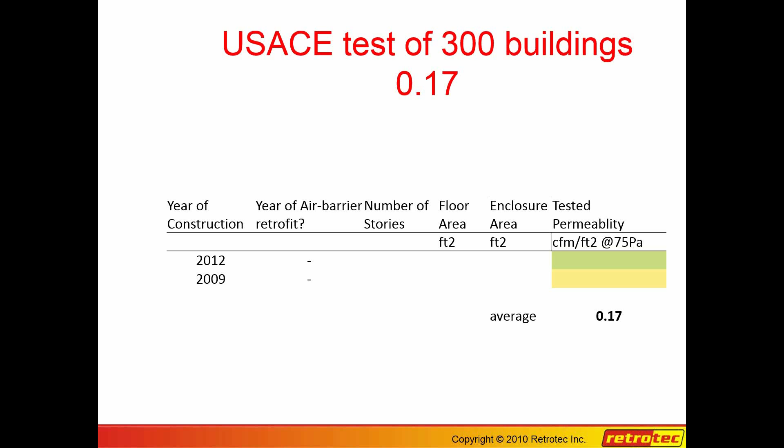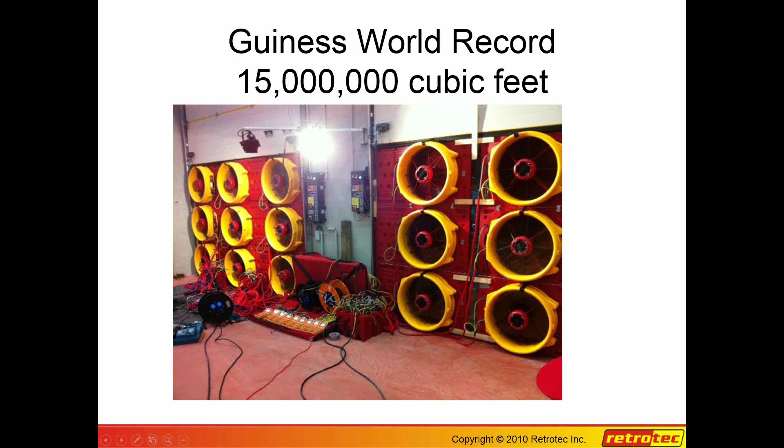So that just gives you an idea of where we might be going, and then now we'll talk about how we're going to get there.

So the simplest building we can consider is just one big box, and pretty much doesn't matter where you put the fans. You can put them anywhere, pump up the box, and measure the pressure anywhere. That's pretty simple. That's kind of what testing a house is like - you pressurize the entire house, even if you've got a partially open doorway. There's very little volume behind the doorway, very little surface area to leak, so you pretty much get exactly the same pressure instantaneously everywhere in the house.

So as we move on from there, we get more complicated situations, and I'll just look at our next slide here.

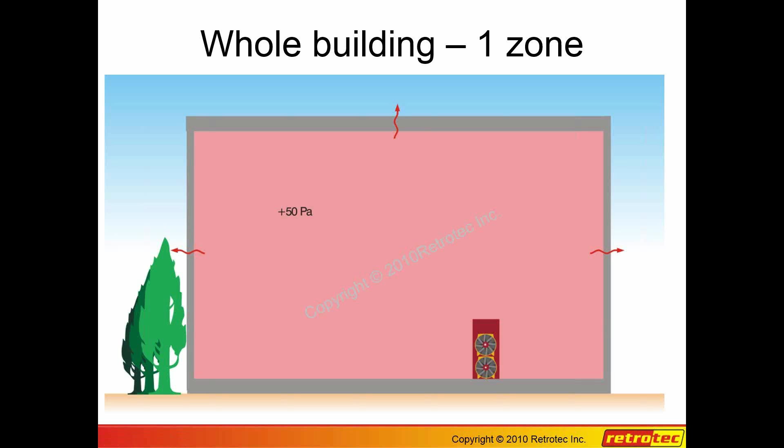So this is what a connection looks like in a large space. We're doing all the connections from outdoors simply because there's more room. Normally these tests are done from inside, but you should be able to do them from either side. With our equipment, the red tube always goes through the panel - here you see it going through the panel into the inside portion of the building. And if you're inside, the red tube still goes through the panel. In that way, our fans are referenced, assuming that the red tube that goes to the red port is going through the panel.

So since in this diagram we're outside, the blue tube, which is the positive side of channel A, is picking up the pressure outside. And here we've simply teed this off, so we've got a T on here, and we're picking up the pressure in 2 locations, roughly to the extremity on one side versus the other side of the building. We're not going to get into a lot about the best places to pick up pressure - we're just going to look in this presentation primarily at how we should be making our connections.

So here, going to the fan, we've got this kind of orangey brown connector, which is the control going to the fan, and we've got a yellow tube that picks up the flow pressure, and the green tube, which is the reference port.

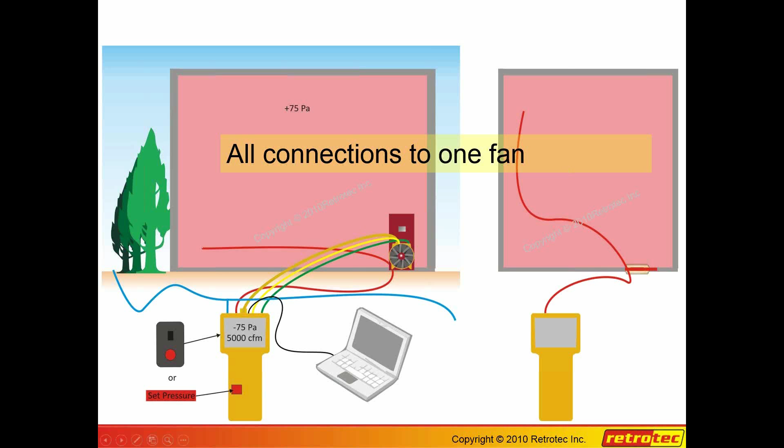So this is one gauge hooked up, and here we're breaking it down. We've got the gauge outside, we've got the red reference tube going inside, we've got one large volume, so we can pick up that pressure anywhere, it doesn't really matter.

A good rule of thumb is if we've got one gauge, we probably need to pick up one pressure inside the building. By the time you get to 3 or 4 gauges, you probably need to pick up pressures in 3 or 4 locations. But usually one fan is doing one floor, or a volume of building small enough that a single pressure pickup inside the building will work. We can also, if we have to, tee them together and get some kind of averaging system inside the building, but usually it's not necessary.

So this is us outside the building, and this is what it looks like if we're inside the building. We reversed everything. You'll notice that now the gauge is inside. The red tube is running through the panel, same as it did over here, but now our pickup points outside are red tubing as opposed to blue tubing. The reason why we color code them is so that you can't make a mistake when you make a connection. As long as you put color to color, you're okay. As long as red tube goes through the red panel, you're always okay.

We show over here that these tubes should be roughly about 25 feet from the building. The reason for that is that when the wind blows, it tends to impact the wall and create a pressure field around the building that fluctuates much more than it does, say, 15, 20, 25 feet away from the building. So this is the area where you get the least pressure fluctuation due to wind, and it's something anybody testing large buildings needs to spend a fair bit of time experimenting with, putting tubes in different locations and watching the effects.

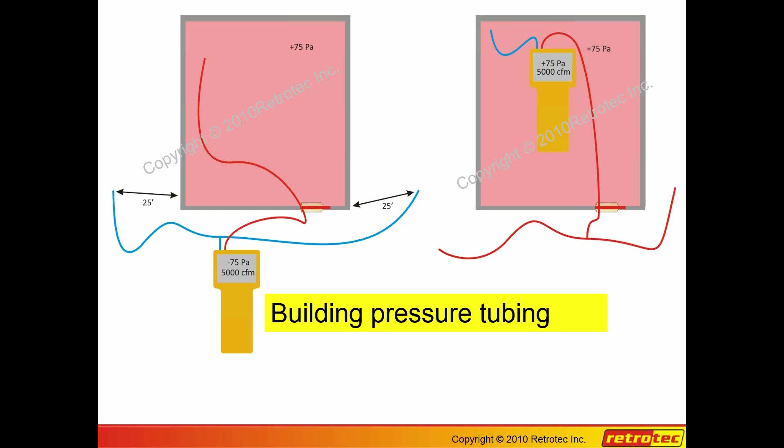So let's carry on to slide number 8, I guess. This is just kind of a review: red building pressure, flow reference. I've already gone through that, so we can hippity hop along here.

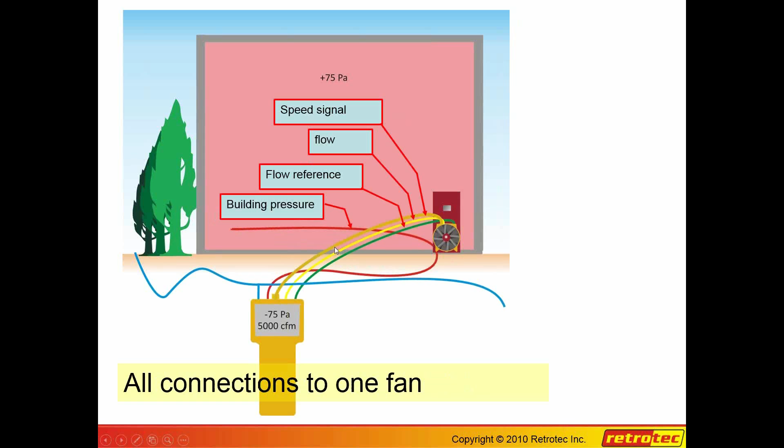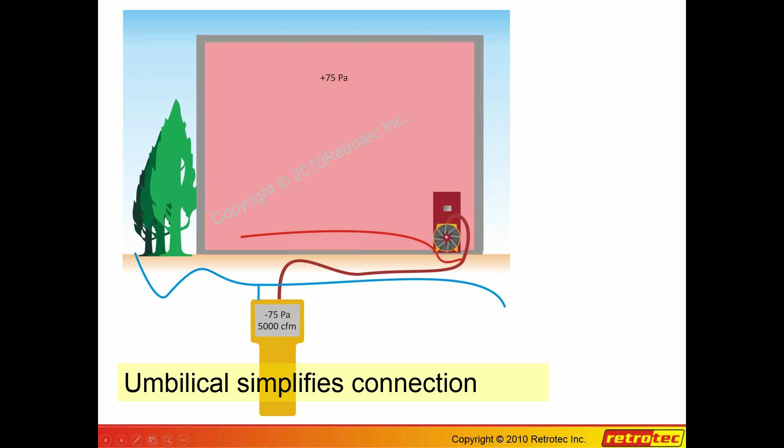In this slide, we've shown how we've taken this kind of confusing mass of tubes—1, 2, 3 tubes and one wire, and there might even be a charging wire in there as well—and cleaned it up into one umbilical. This makes setup much easier since you attach the umbilical on one end to the gauge and the other end to the fan, and you're good to go. Those of you who use our equipment are familiar with that umbilical approach.

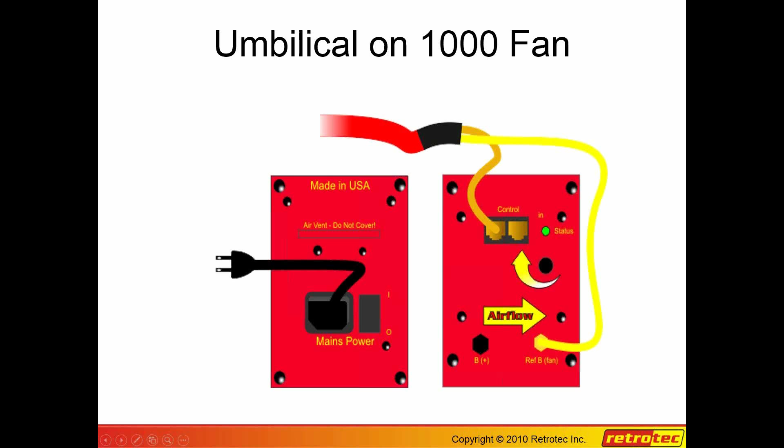Our manuals do a pretty good job of showing this, and here we've got an umbilical that goes between the top of the fan and, in this case, the variable frequency drive. This is one of our older units. We have pictures of our newer ones, which we'll get to later.

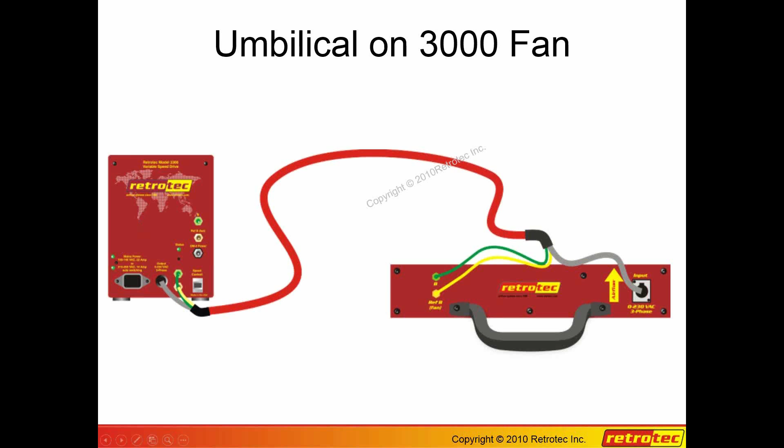The first connection to look at is how we control our fans. In this case, we're standing outside with gauge number 1, which we'll call our master, and this master is enslaving all 6 fans. So our control signal is essentially going from 1 gauge to 6 fans—all receiving the same instruction, maybe go to 50%, and they all go to 50%. Those 6 fans act like one big fan; they just happen to have 6 separate fan blades, all going in concert up and down together.

If instead we were to send 6 separate control signals to those 6 fans, if one picks up speed a little, another might slow down, and you can get a situation where one fan stops completely and the others take over the whole load, becoming a big hole in the building. With regular house testing fans using permanent split capacitor (PSC) motors, if one stops and there's enough pressure in the building, that fan can actually start spinning backwards and even run backwards. I've had situations with 5 fans running forward and 1 running backward, and guess what—that building showed as being a lot leakier than it actually was.

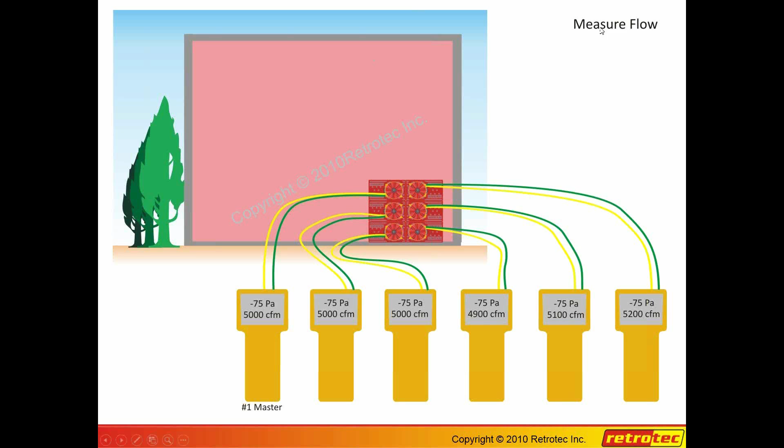So this is the measurement flow circuit. In each case, it's going to channel B of these gauges. And the way we configure our systems is one fan, one gauge. What that enables you to do is break your system up into as many pieces as you want.

In this case, if we've got 6 fans, we can do 6 separate tests. We can do 4 here and 2 there. Any permutation or combination of those can be moved around, and we tend to keep our fans and gauges together as sets so they can be used in any combination. We have some kind of control signal that's been sent out, maybe 70%, go to 70% speed. What's coming back to the gauge is the flow signal, and it's showing what the flow is.

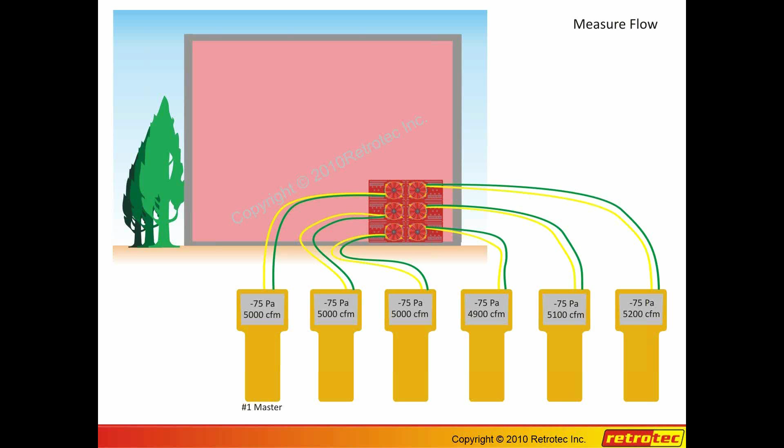Now we're looking at the building pressure, one layer at a time. We looked at the control signal, we looked at the flow signal, now we're looking at the channel A signal, which is the pressure we're achieving in the building and the pressure we're picking up outside. Now what we encourage here is that we want each one of these gauges to receive the same reference pressure.

So the reference pressure - maybe reference pressure is a bad name - the outdoor pressure should be the same on each and every gauge. So what we've done is we've picked up our pressure with the blue tube in 2 locations. We've teed it together, we've manifolded all that together so that each and every gauge is receiving exactly the same pressure on the input port of channel A.

So in this case, we've got a red tube which goes through the panel and picks up pressure here. Another red tube goes through here and picks up pressure here. Another red tube goes through here and picks up the pressure there. We've taken that pressure and copied it or paralleled it up so that all these are getting the same pressure, basically. In this particular example, we don't really need to measure pressure everywhere in this box because it's going to be the same everywhere.

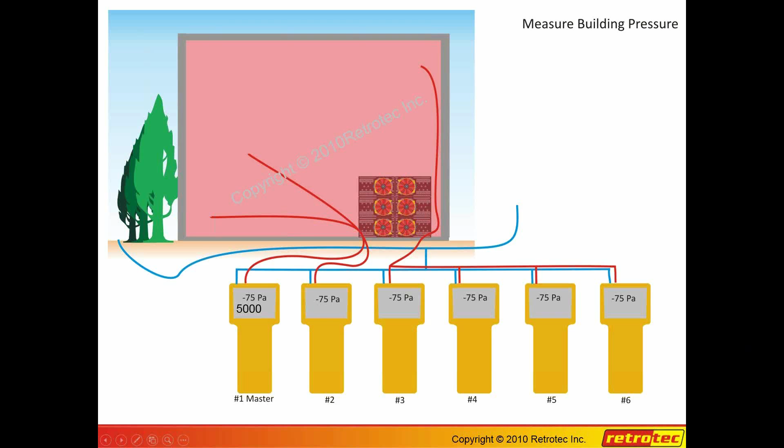So now we want to go into individual control versus common control. On the previous example here, we had common control, meaning each one of these fans is receiving a common control signal, so these are all acting as a unit. We may not always want that, and we need to be able to recognize when we want common control and when we want individual control.

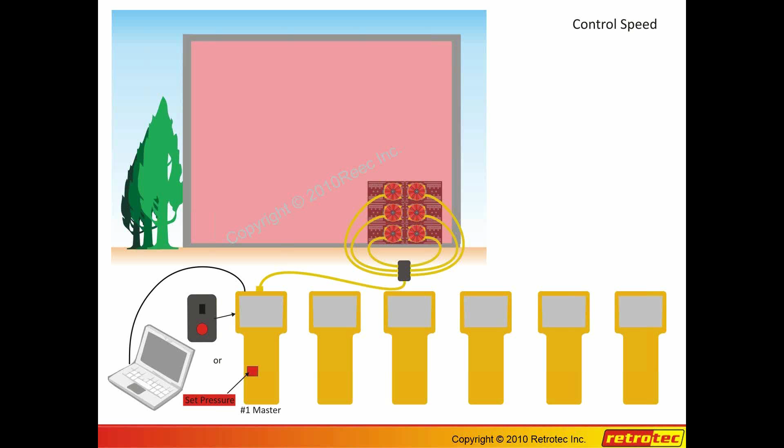The example I mentioned earlier, where one fan has got its own flow signal and its own control loop, it could actually start running backwards, so we don't ever want that. Let's advance back to where we were and take a look at individual control.

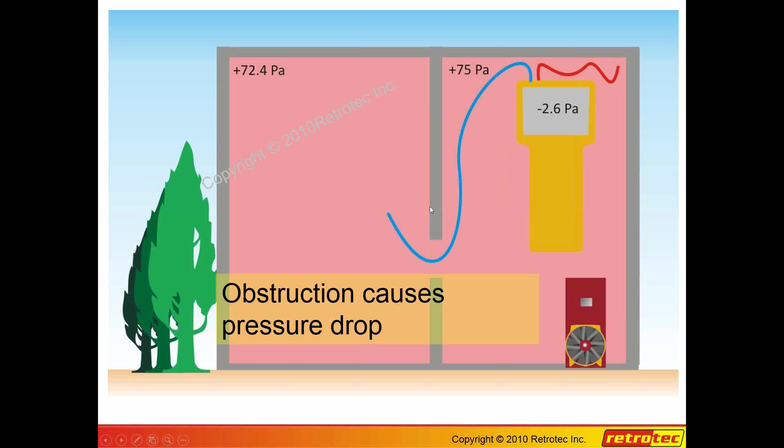I'm starting this with different pressures that we might see inside an enclosure and why we might see them. In this case, we've got a relatively small hole here, and we've got, let's say, 75 pascals here, and 72.4 pascals over here. There's a difference of 2.6 pascals. We're not actually achieving a common pressure inside the enclosure.

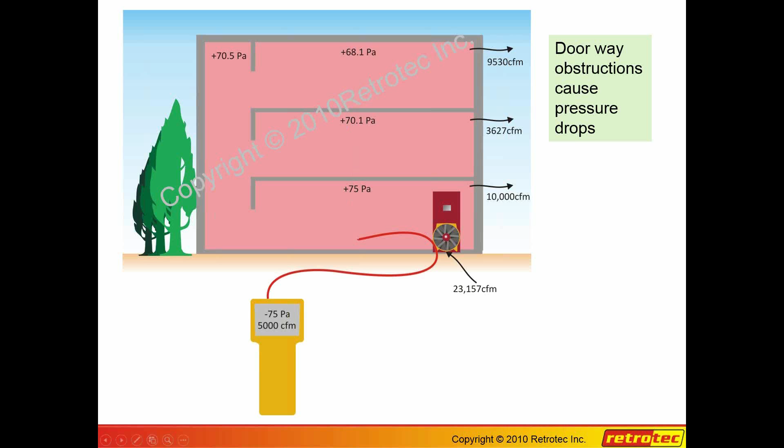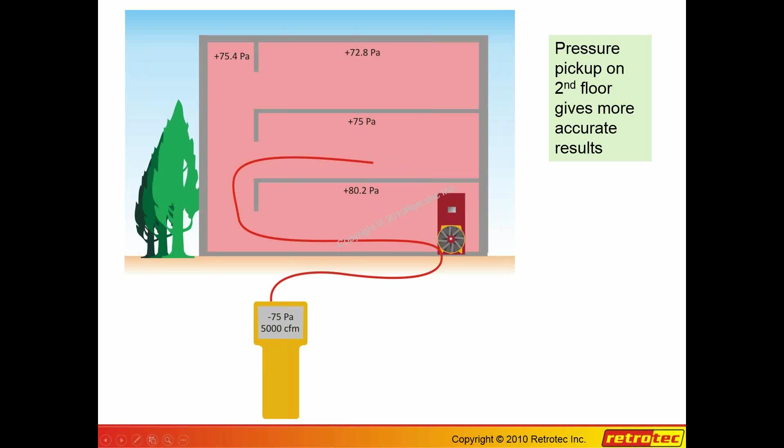Here we're controlling to the pressure on the mid-floor, so this is over pressure, this is under pressure. So one way to do that is to try and distribute the blowing power around the building.

Very commonly, we will have a stairwell at either end, so often the stairwell is a really good way to drive the airflow up into the upper floor, coming from two sides. If we put two fans into one stairwell here, we would get excessive pressure drops inside the stairwell, so the pressures up at the top would be less.

I recall a test we did on a three-story building. We had 50 pascals on the main floor and something like 25 pascals on the top floor, because we didn't have enough stairwells open to the top floor in order for the flow to get there.

So in this case here, we need to have probably individual control, since each one of these fans is controlling to its own pressure. If the pressure was a little bit high on one end of the building, this fan would take care of it. If it was on this end, then that fan would take care of it.

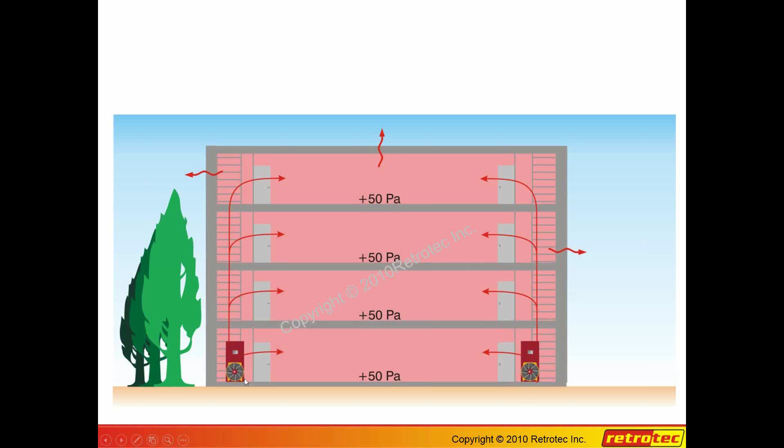I can't remember what this was there for exactly.

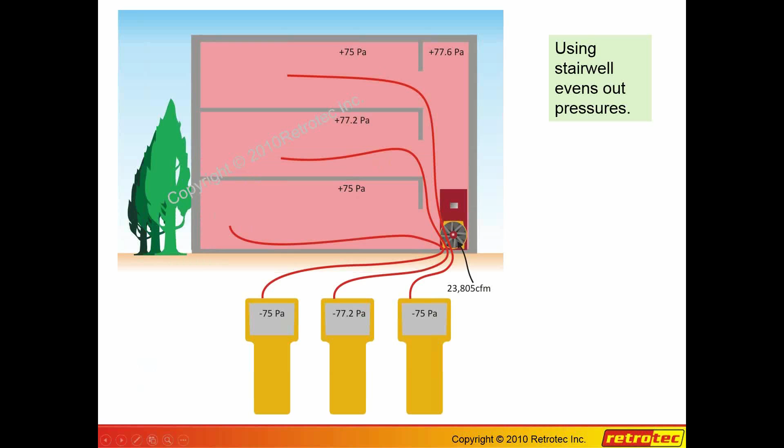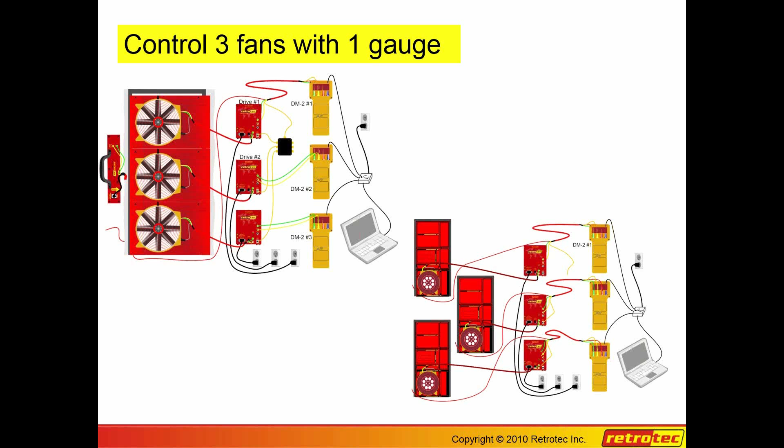Then there's a third one, which is hybrid control. There's actually a fourth one also, where you may have two banks of fans on each end of the building. Each one of those banks is common, but they have individual control with reference to the pressure they're controlling on their end of the building. I think I have a diagram that shows that later that will make that clear.

So what this would look like with the DM2 configuration, for example, is we have the gauges close to the computer in this case. The gauges go into a hub, the hub goes into a computer, which looks at all the different fans we have out here that could be 20, 90 feet away. So here we're actually extending the tubes from the fan all the way to the gauge.

So that's the way we used to do it. This is with the 3350 control. So do we have common control or individual control? We have a signal coming from this gauge. It says control, and it's running into this fan. And the new controls all have

the ability to daisy chain the controls together. So the signal comes in and then comes back out and into the next one, back out into the next one. So all 3 of these controls are receiving the same control signal. Each fan receives the same control signal, though not necessarily the same flow through the fan. So the flow signal comes back through here to its gauge, and this flow signal comes back through here to this gauge.

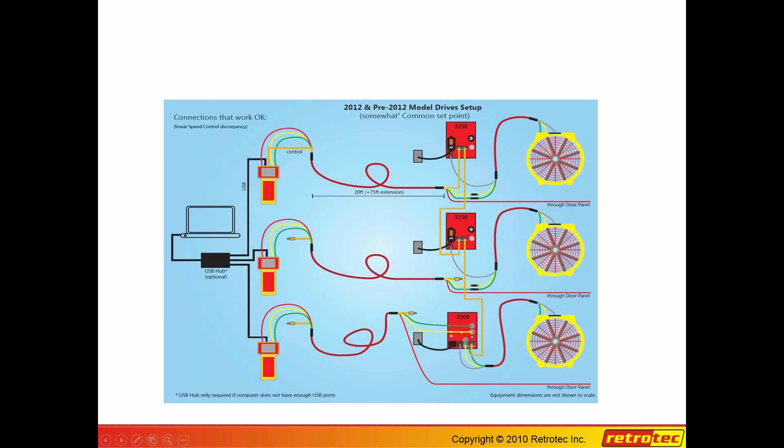Notice in this diagram this control connection is disconnected. This gauge is not controlling anything. This gauge is controlling everything. So this is our pre-2012 setup. Let's take a look at what we're doing now.

So that enables you to hook up these gauges to this computer, and we could have another mirror image of this on the other side, so we could have another 3 fans off on the left side, giving us 3 fans on one end of the building and 3 fans on the other end. So again, common control - each one's receiving the same signal.

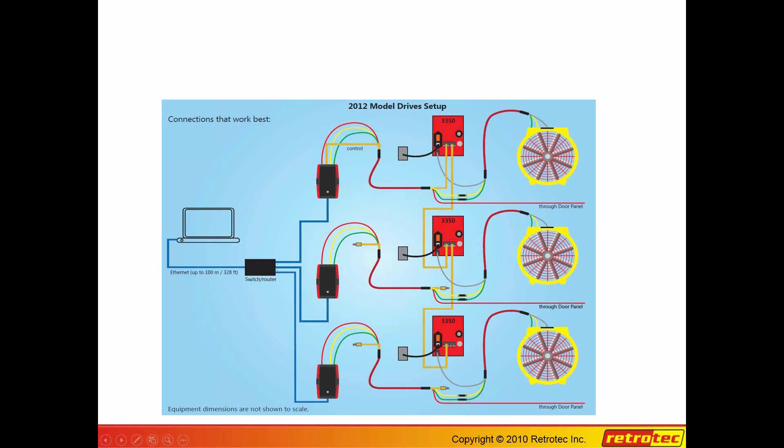We might pass these through a door panel. I would be inclined to want to manifold these together once they got outside so they were all receiving the same signal outside.

The pressures that we would be picking up from these fans would be picked up from the blue port on this gauge, which is just kind of where the gauge is. You may want to extend that somewhere else in the building, away from the fans, but essentially what's going on is we're picking up the building pressure in 1, 2, 3 locations, and commoning it outside. If we were outside the building, these tubes would have to go to separate floors if it was, let's say, a 3-story building.

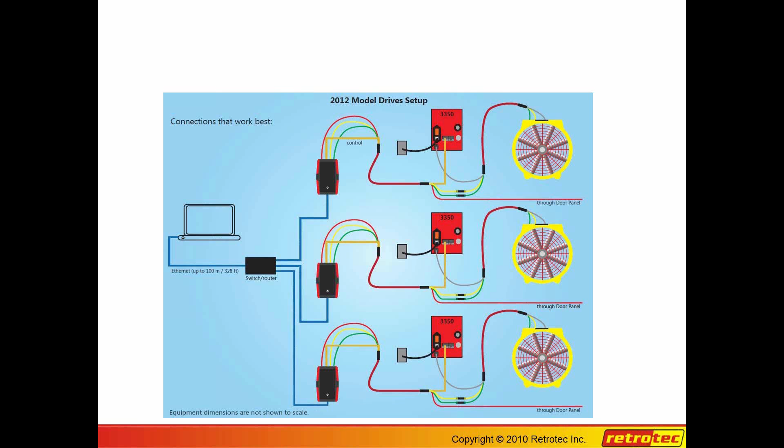You can create common control simply by wiring it so that one control signal is daisy chained into all 3 fans. You can also make the change in software, where you have individual control cables going to each fan, but you simply uncheck the individual control box, which means unchecked is common control, meaning the number 1 gauge you've chosen is the one sending out the control signal. This is global, meaning it changes the signal going to every fan on your network, so it would be either individual or common.

In a lot of cases, you want individual control, meaning the software controls the East Bank and the West Bank individually, but the fans within that bank are commoned together, if you know what I mean. The best way to get a handle on this is to go through our exercises, so you can experiment in a relatively small space and see the effects of individual versus common control.

What you don't want to do is get into a great big huge building test with fans running and roaring all over the place, and oh my God, this fan's going backwards and this fan stopped. It can be really crazy. You really have to get a handle on this before you get into a job site situation.

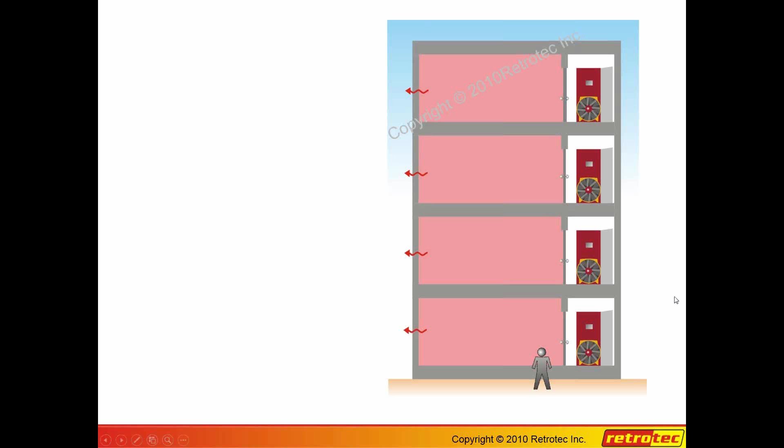So here we have a situation where we've got outdoor balconies, let's say, and we want to test the entire enclosure leakage. We can stick a fan on each floor. So it would be interesting to consider: do we want individual control or do we want common control?

Since the results of the flow from this fan aren't felt very much in this space, we want individual control, so each fan is controlling its own space.

This is actually a pretty common example of what you would need to do to test, say, row houses, where you wanted to eliminate the connection between the units so that the pressure across these units would be close to 0 if each one was set to 50.

What would happen is they would all receive the same control signal or set point, all saying go to 50 pascals. But the signal that comes out of the fan to cause it to reach 50 pascals might be different, because this unit is probably a lot leakier than this unit, and this unit is leakier than that one. So this fan might be at 60%, this one at 30%, this at 25%, this at 80%, to achieve the same pressure result. That's where individual control comes in.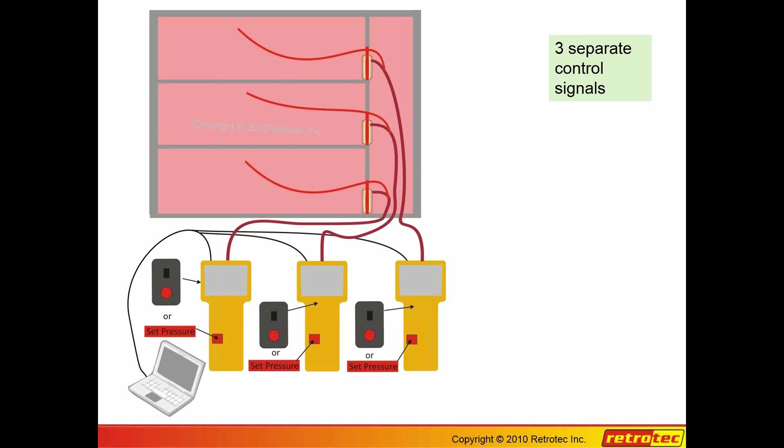It's a concrete building, so we're thinking, hey, we have to have individual control. But in fact that really wasn't the case. We'd almost be better off having individual control between the 1st floor and the 4th floor and running those fans at the same speed. But you have to see it to believe it, so that at least when something weird is going on, you can ask yourself the question: is that a control problem or is it some other kind of problem?

So we have a fan on each floor. This fan in the middle is probably blowing a lot less air: 10,000 CFM, 10,000 CFM, and 3,000-some-odd CFM in the middle. So obviously the fan in the middle is blowing a lot less air. In this case, we've got the stairwell open, we're sucking air from the stairwell, and we're controlling all of our fans individually.

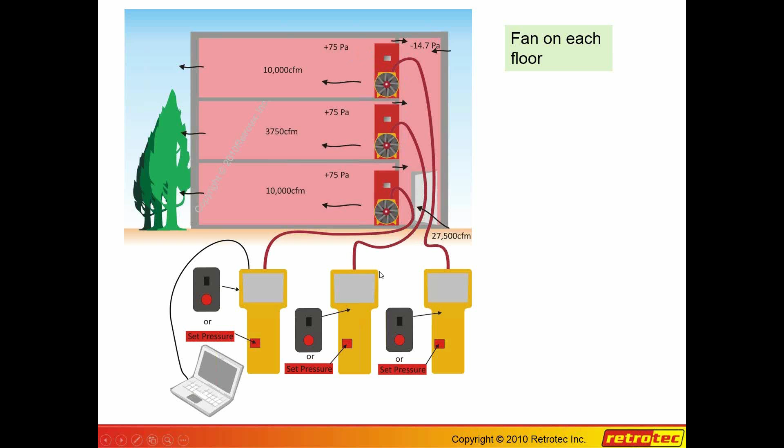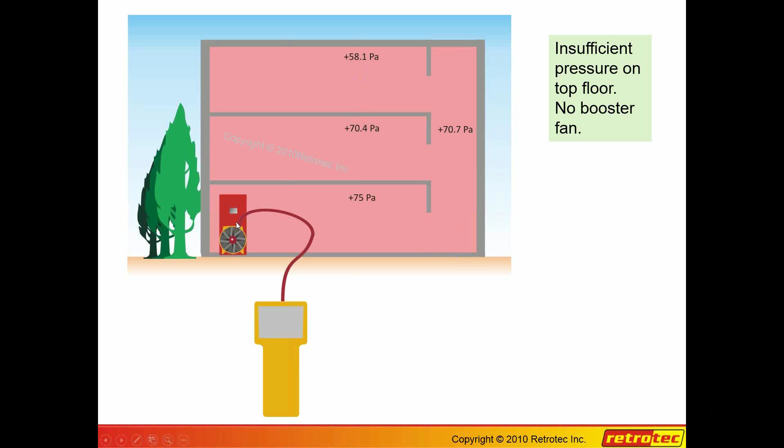Sometimes we're in a situation, very common, where the top floor can be very leaky. We have one fan on the ground floor, and we have insufficient pressure on the top floor. What we can do in a case like that is run another fan on the top floor, and the purpose of this fan is not to measure flow. In this case, we're actually setting the pressure to 0 between floors.

Now you can see we've got this up to 75 pascals, so we're setting it to 0 between here and here. When this drops down, it automatically sees a gap of 7 pascals, and this fan boosts the pressure onto this floor and decreases the pressure in the stairwell in order to keep this floor at the right pressure.

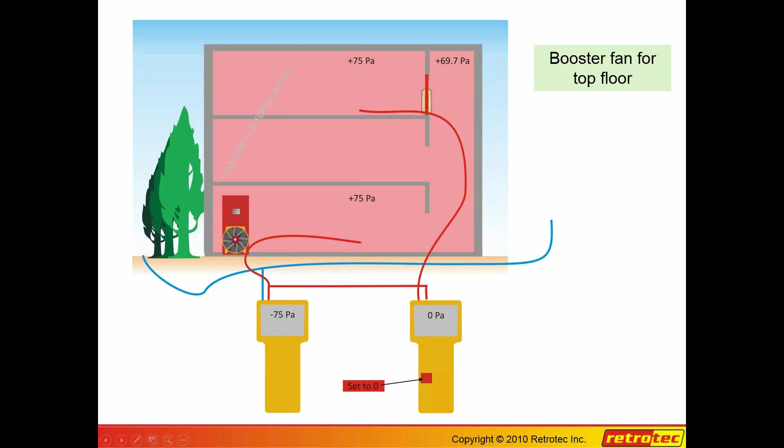So this is what we call a booster fan, and it's not part of the flow measurement device. We simply hook it up; we don't take the flow signal and put it into our software. All we do when we start is set it to 0, and the moment that pressure goes away from 0, it starts controlling on its own little control loop. We do not measure flow. That has to be done manually, the software won't do that. You might even want to run that fan manually with a control knob, but we can make it run automatically.

Another way to do this is to measure a floor at a time. In this case, we're measuring the first floor and using this fan to neutralize the pressure between these floors, again using the set to 0 function. That's to find out how much this unit is leaking to outdoors. So we've neutralized the pressure across here, which is a way of isolating leakage in one part of the building.

Sometimes this is a technique you would use when doing an analysis of a very, very large building and you only have access to a small piece of it. You can actually neutralize the pressure across the floor or across the wall using this technique.

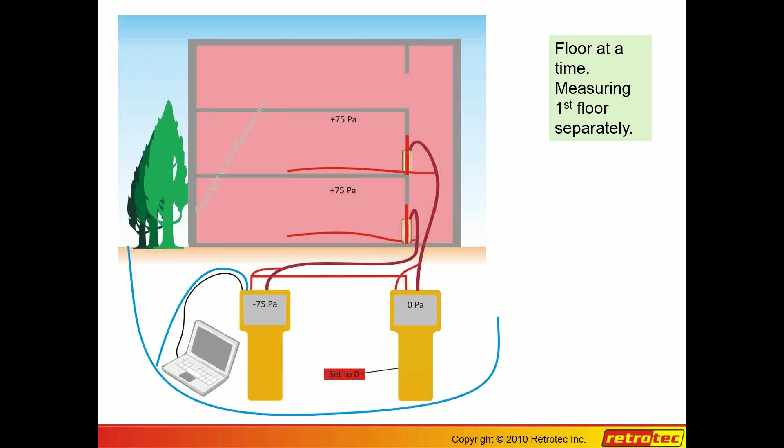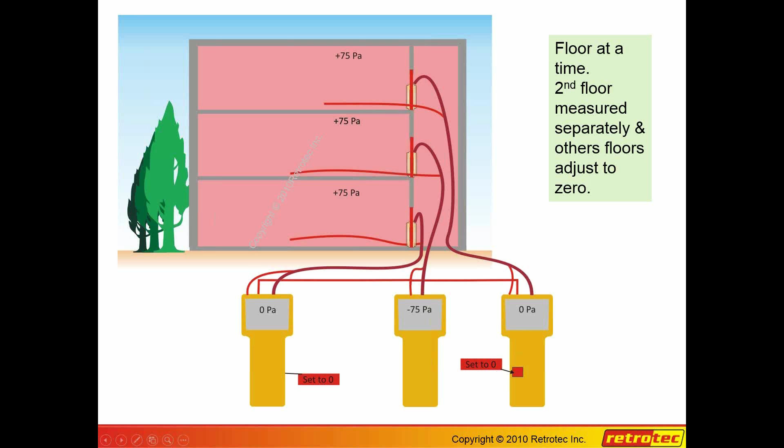So in this case, we're measuring the leakage of this unit, and we're neutralizing the pressure on the first floor and the third floor with the set to zero fans over here, while measuring the flow rate with this fan. This is kind of advanced testing, something you really want to experiment with so you're sure you're familiar with it, but we wanted to show you how you hook these things up so these connection diagrams are accurate.

Measuring apartment air leakage. This is part of a study that we did here in Vancouver. These are the individual apartments that we measured. We measured the leakages on all 6 sides using the techniques that we showed you earlier.

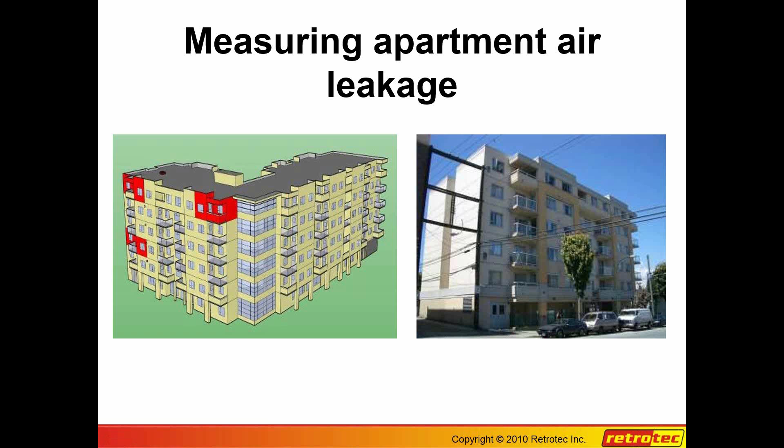So the first one is what we call a simple apartment test. I just have to catch up with my multiplicity of slides. There we go.

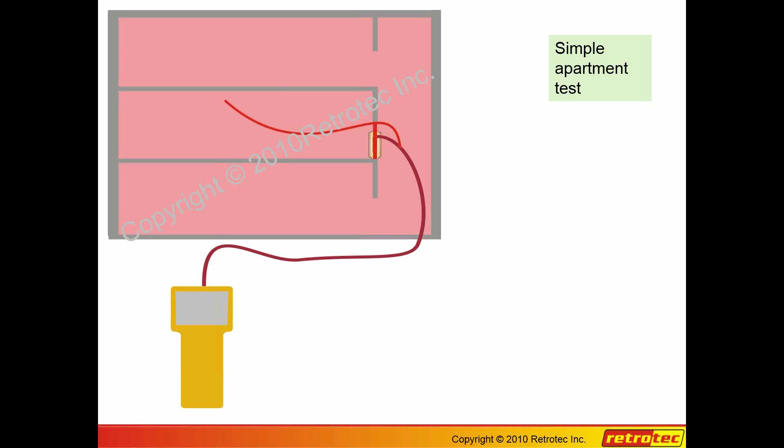So this is what it looks like configured the way we have been showing it so far. Normally when doing a single apartment test, we're going to be in the hallway. In this case, this is a type of construction used in some parts of the country where there is an exterior hallway open to outdoors, which requires its own particular technique. So here we're measuring all 6 sides of this particular apartment, which is what you would do for LEED testing or something like that.

I notice there's some questions about individual control. The best way to learn about individual control is to have it mess up. You really have to purposely mess it up so you can see, okay, I messed it up, and now I went to individual control and sorted it out, or I messed it up and went to common control and sorted it out. If you don't see it mess up, you'll never see a need for it, so none of the stuff will make any sense whatsoever. But when it messes up and you're on the job, you go, oh my God, what the heck is going on here? People say, oh, my fan needs to be calibrated, it must be reading wrong. Individual versus common control could be one of the reasons why.

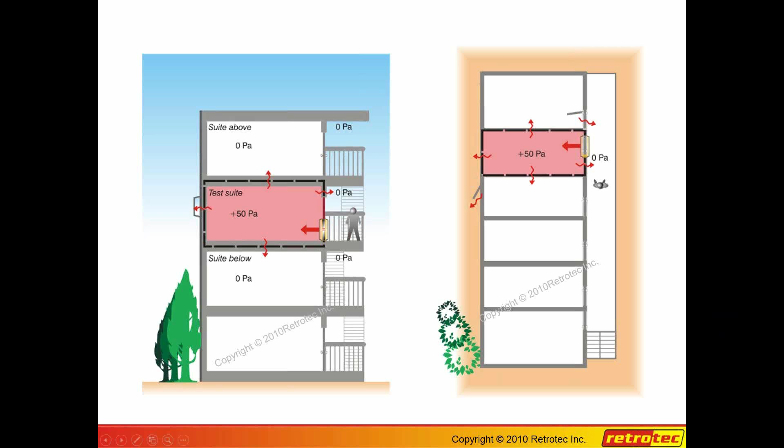So here we're talking about zone isolation. We've got a different configuration of building. This stairwell or hallway is inside the building, and again we're measuring an individual apartment. It's got 2,000 CFM leakage to the outside. In this case, we've got a fan mounted in the hallway, and we're pressurizing the apartment to 50 pascals.

If this flow dropped from 2,000 CFM to 1,800 CFM, guess what? There's roughly 200 CFM leakage across this particular wall. So that's what that's told us, and that's one piece of the puzzle we've been able to figure out.

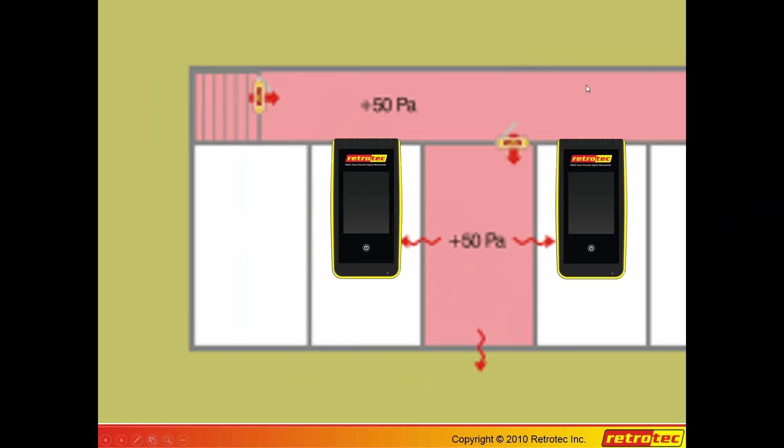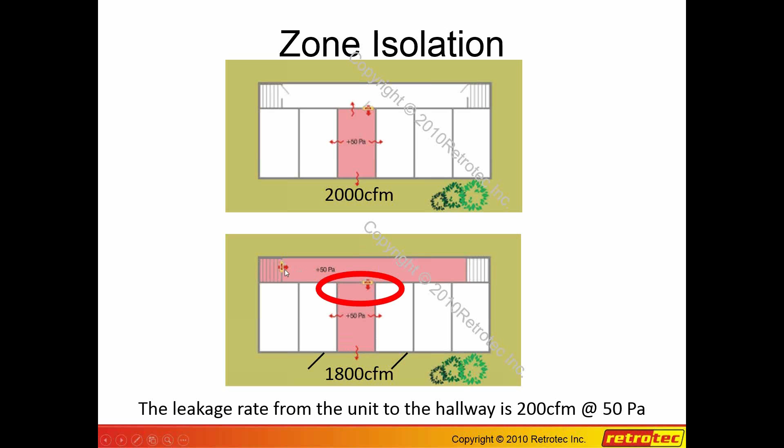So this slide—let's see. Oh, there we go. This is a bit fuzzy because we blew it up, but it's the same one we looked at before. I'll just go back and take a look to reorient yourself. So we're taking this slide, blowing it up, and asking ourselves, how the heck did we tube these fans together? We're going to look at that in detail so you can get one tubed up right.

So this gauge goes to this fan. We've shown it stuck on top of the apartment just so, but it would actually be in the hallway, it's only this big, so we've blown it up a bit. This gauge here is controlling and measuring the flow through this fan. This gauge is not measuring anything except the pressure in the hallway—it's not measuring flow at all. It's a neutralizing fan that's neutralizing the pressure across this wall.

So the first, or the only, measurement we're making is a flow pressure measurement between the gauge, channel B, to the fan. That's going to tell you what the flow rate is through this fan.

Then the red tube goes again through the panel into the apartment. It's measuring the 50 pascals, we've got that. Channel A of this fan is measuring the pressure in the hallway at 50 pascals. So we set to 50, set to 50 over here, and the two of them balance each other out. You'll notice when this fan starts up, this one's going to wobble back and forth until the two of them go into balance, and at one point they'll go into balance.

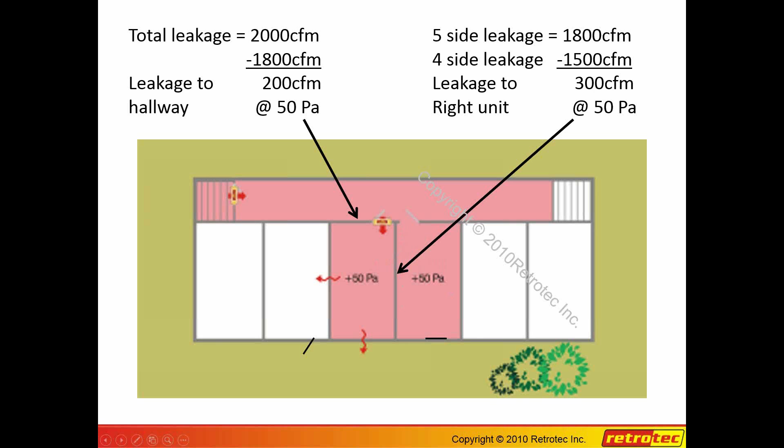Using a similar technique, we can diagnostically find out where each apartment is leaking to. It will characteristically leak between floors, into the hallway, to outdoors, or to the apartment on either side, depending on the construction, and not necessarily even depending on the construction materials or the design. We've noticed that different buildings just leak in different directions, and often that will tell you why they're having certain problems. It might be air quality, it might be this or that, but it tells you a lot about what the dynamics are between the units.

My contention is ideally that each one of these units should be as isolated as possible from its neighbors, for the purpose of energy, which is minor, but more importantly for sound, odor, pollution, that kind of thing. I think these need to be a series of sealed boxes, have their own connection to outdoors for fresh air and so on, and I see a trend in that direction for new buildings where they're not reliant upon even an HVAC system common to the entire building. Individual HRVs for individual apartments are starting to find their way into designs, and I think that gets around a lot of the problem of how these buildings get all hooked up and what happens to one unit affecting another.

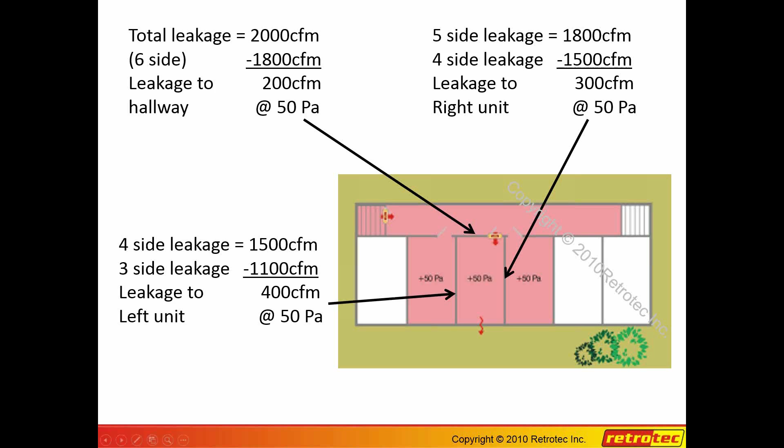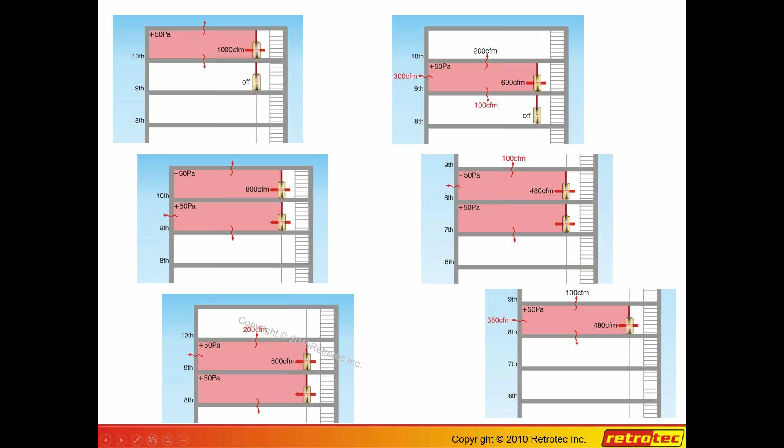So here we have a series of 3 fans running, and by turning various fans on and off, we can find out not only what the leakage is of this unit to the outdoors, but also the leakage between units from floor to floor. So we can really find out a lot by doing this kind of analysis. It's important that you get the procedure down of measuring the leakage between 2 units before you start worrying about doing 3 or 4 units at a time, which is what we're doing here. It's a matter of starting at one point and moving forward so you can increase your skills and use this as a powerful diagnostic tool.

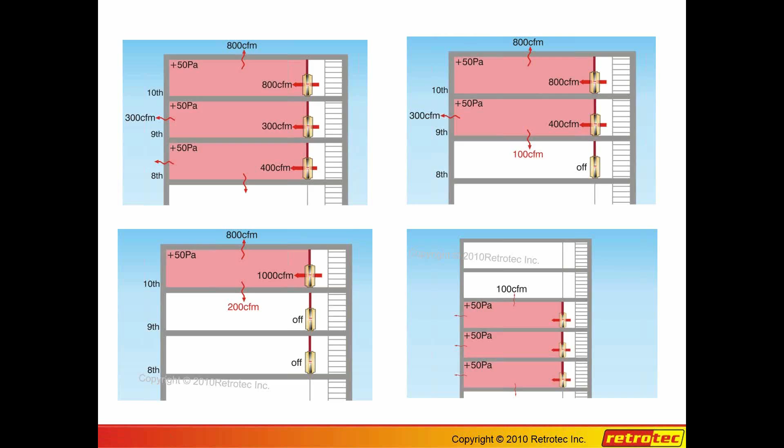One is that it's very proficient at running over Ethernet cable over long distances. It has an Ethernet cable connection on the bottom. I think there's some kind of annoying timing on this slide here that's jumping off the screen for me. Oh my God.

So in this picture here, if we're doing a test with 4 gauges, we can actually run a virtual gauge, because bear in mind, these gauges will be at the fan that might be 10 stories away. I need to find out who put this wonderful feature in here so I can kill them.

This enables us to bring the gauges up, and whenever we're doing a test on a large building, we always want to run each fan through its paces, make sure it's connected, make sure the tubes are doing the right thing, that they're sending signals in the right direction, that we have a positive control, and so on. You can do this by running a virtual gauge, and each one of these gauges represents a gauge that's somewhere in the building connected to it by Ethernet cable. So we can look at each gauge individually, check it out, check out its control loop, make sure it's functioning properly, and so on. This might be a leftover from previous.

So here we show one coming up, and here 4. We can resize these and make them any size we want. We can put 25 of them on the screen if we want and drag them around. They show you the serial number of the gauges, so wherever your fans are located, you can create a little diagram for yourself that shows you where the different gauge serial numbers are located, so that when you come down to your unit and bring them up on virtual gauge, you can say, oh, that's this one, that's that one, and so on.

Once you're done with virtual gauge, you can shut those down, disconnect those electronically through the virtual gauge, or just close virtual gauge down altogether, and then allow FanTestic software to pick up on those connections and run them into the FanTestic software. So you can either do one or the other, but currently you can't do both.

So the way we're tubing them up now, you actually have the gauges at your computer so you can look at them. And this is a way that you can, with the DM32 gauge, actually look at the gauge remotely and control it. It's two-way control. Whatever you do on the gauge happens in virtual gauge. Whatever you do in virtual gauge happens on the actual gauge. So it's two-way, you can control it from either end. If you get someone on the 3rd floor and they monkey around with your gauge, you can see exactly what's going on there. I think it's a very cool feature and a great little training feature as well, but particularly on a job, you don't want to be running up and down to the 10th floor to find out what's going on with the gauge, to see why you aren't getting a signal out of it. All that needs to be done in advance.

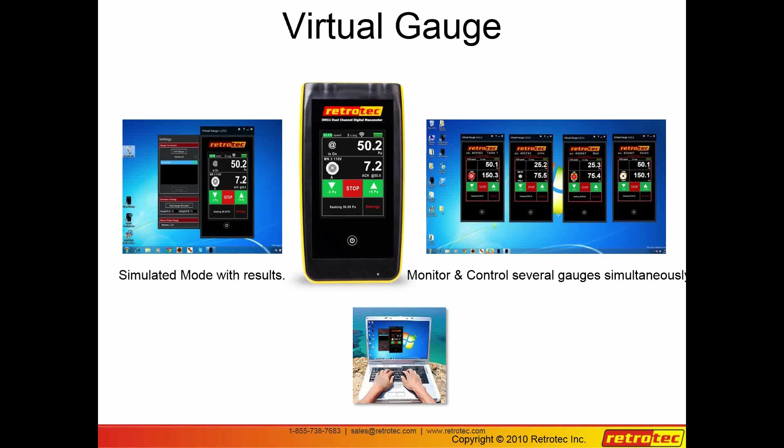This is where you get virtual gauge. On our website, you can just click on virtual gauge and go right in there. It's a free download, and it'll run on any computer. You can actually simulate the gauge and try out all of its features without even having a gauge.

So you have the choice of simulated mode, where you've got a gauge that functions like a gauge, and non-simulated mode, let's say, where you have the option of connecting to any of the gauges in the system.

For those of you that have Energy Conservatory fans, our gauge does a great job of controlling them. We have an adapter that controls their gauge. Our control signal goes into the adapter, and then it's translated into a PWM signal that controls their fan, and the flow signals come back and our software handles their flow signals correctly. It's the control signals that are a bit tricky. Flow signals, no problem. All of our software will work with any fan out there.

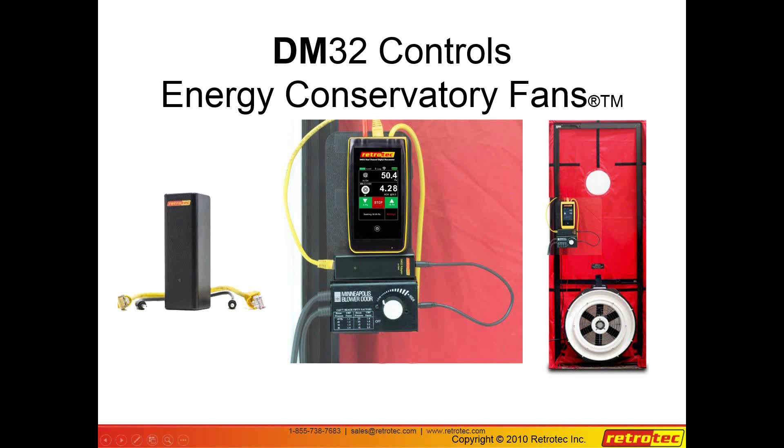So you can combine Energy Conservatory fans, Retrotec fans, Infiltec fans, anything you want, as long as they're running on a DM32 gauge. A very cool little feature. Let's see what else we got here.

The great thing about this software, I believe, is that you set the parameters and it does it for you. So for baseline, you say, I want to take 12 baseline readings for 30 seconds apiece, and then I want to shut down and cover my fans. Or I want to take 12 readings for 20 seconds apiece, and then immediately start running a test from 25 to 50 pascals. I want to take each induced pressure reading for 45 seconds, and my criteria for attaining the desired pressure is that it be within plus or minus 0.5 pascals, 1 pascal, a certain percentage, whatever you choose.

Once you set it up, you just press the button and it goes and does everything for you. It makes the decisions. You don't have to control any fan, you don't have to make any decisions, you don't have to touch anything. It records all the data.

If you happen to get one test point which you don't like, you can go in and repeat that test point. There's a semi-automatic mode, so if you have one test point where a door opens or something happens that you haven't considered, you can go back and repeat that point and put it back into the software.